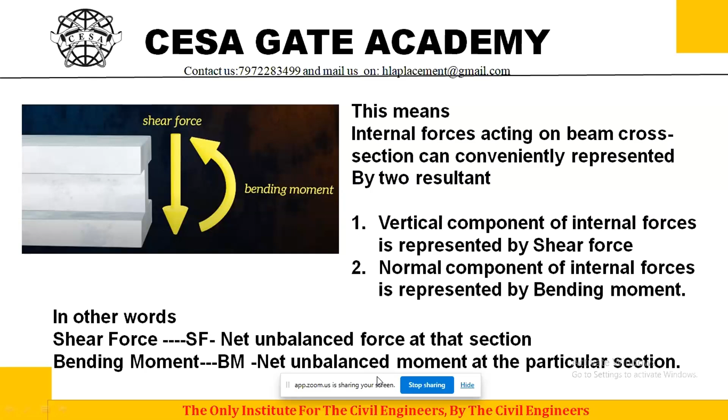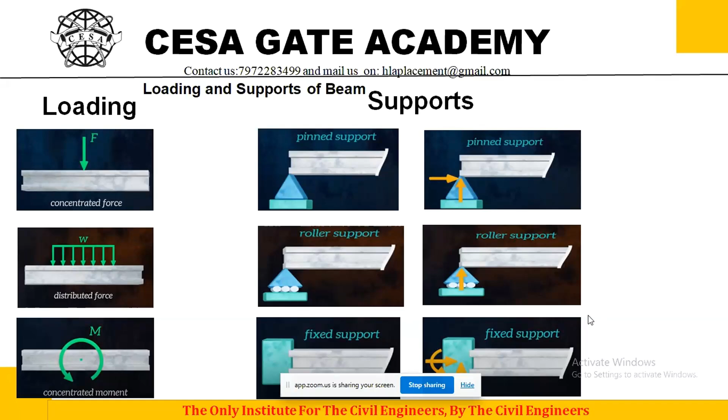Now, before going for the examples, this is just a quick revision of what we know as loading. So we know the concentrated load, we know the distributed load. In the distributed load, the uniformly varying distribution is also there. Then moment, concentrated moment. Then in supports, there are different types of supports considering the beam as a part. Pin support is having two different reactions, one horizontal and one vertical. Roller is having only a vertical reaction, and fixed support is having the moment along with horizontal and vertical reactions.

Now, what is the shear force and bending moment diagram? This is the variation of shear force. If we go on taking sections from one support to the other support, then what will be the unbalanced force at every section? If we represent that value in the form of a graph, whatever variation we are getting is nothing but the shear force diagram. Similarly, if we work out the unbalanced moment at every cross section of the beam from one support to the other throughout the length, and plot that variation, that is nothing but the bending moment diagram.

So there are three steps. First, you have to draw the free body diagram of the beam. Then, as sir mentioned earlier in the mechanics session, we have to work out the equilibrium of the beam and find out the reactions and reaction moments if they are there. These are the three equilibrium equations: summation Fx, summation Fy, and moment. Then determine the shear force and bending moment at a particular section along the beam.

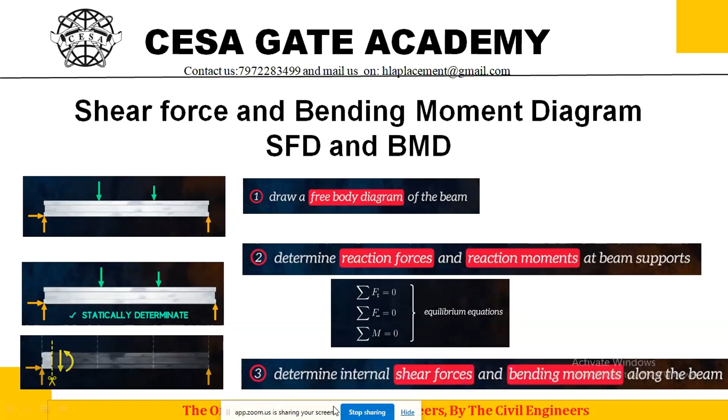Now, general sign conventions which are used particularly for defining the shear force and bending moment. These sign conventions vary according to the concept. Let me tell you, sign convention is for our convenience. If somebody is taking upward positive and downward negative, somebody else may take upward negative and downward positive. Sign convention is for our convenience. We need to understand the sense in which the unbalanced force is acting. Similarly, we need to understand whether a clockwise or anti-clockwise moment is unbalanced at that particular section, and accordingly we can define the sign convention.

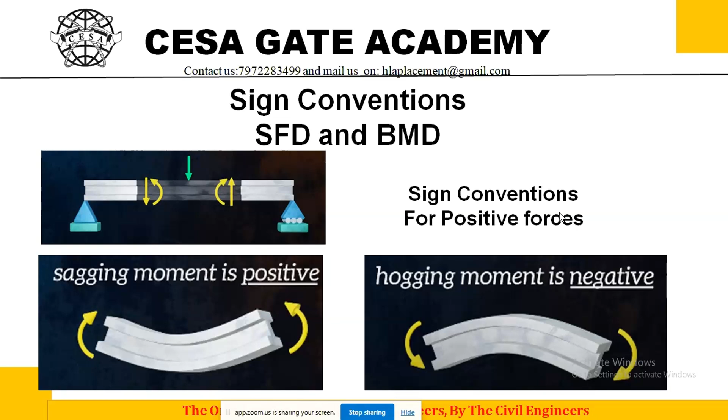Maximum times, the jumbling happens in this particular part of calculation, that is, defining the sign convention, right? Sagging moments are normally considered as positive and hogging moments are considered as negative. Let us take an example. It is a simply supported beam. I'm just taking a simple example. I'll show you one or two examples which occurred in the previous GATE examination. For this demonstration, I've put up a simple example of two point loads, 15 and 6 kilonewton, at 2 meter spacing each.

Now, if we work out the reactions, if I take summation Fy, Ra plus Rb is equal to 15 plus 6, 21, right? If I take the summation of moments at B, then Ra into 6, plus 15 into 4, plus 6 into 2.

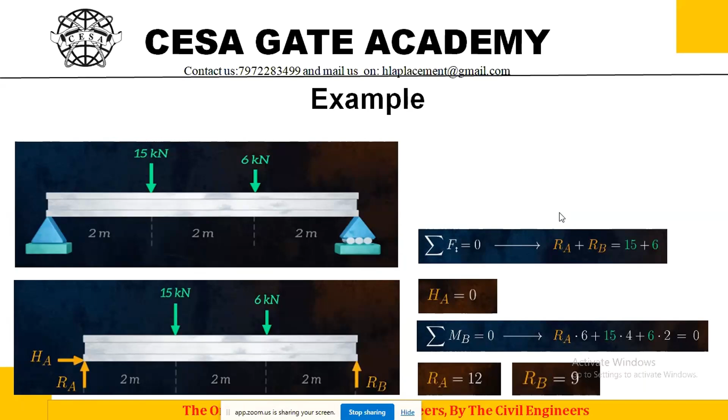So together, Ra is worked out to be 12 and Rb is worked out to be 9. This is the very first step of our shear force and bending moment calculation. Now, if we take a section in between the left reaction and just left of the 15 kilonewton force, in between the reaction and just left of the first force,

what is there? There is only one force, that is 12 kilonewton, which is upward, and there is no other force. That means there is an unbalanced force of 12 kilonewton which is upward. Similarly, whatever moment is created by this 12 kilonewton force is the only unbalanced moment up to just left of the 15 kilonewton force.

Now, you can see in the diagram, shear force is up to 12 and bending moment is 12 into 2, that is 24. This is up to any section in between the left and just left of 15 kilonewton. Once the section line crosses 15, then the 15 kilonewton force gets added. So 12 is upward, 15 is downward. So what is remaining is minus 3 downward. As downward we are considering negative.

So 3 is downward. So at the 15 kilonewton, if we cross the section line, minus 3 will be the shear force. So from 12 to minus 3, the shear force line you can see. And then again from 15 to 6 kilonewton, what will be there? There is no other force which is getting added. So 12 is upward and 15 is downward. This is the combination which remains constant up to 4 meter, just left of the 6 kilonewton.

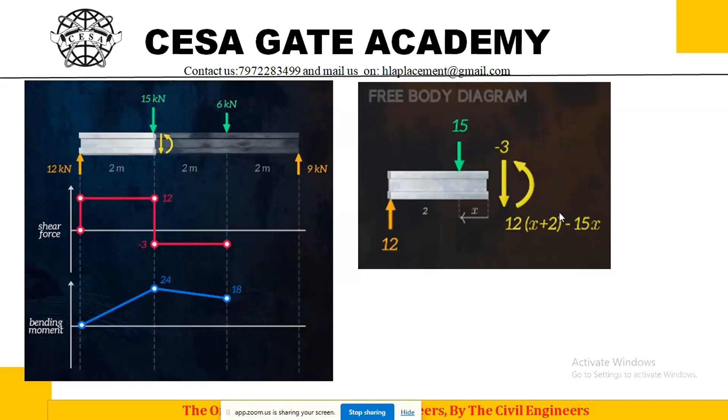So again, as I mentioned in the previous slide, you just have to concentrate on what is the net unbalanced force at that particular section. Similarly, for shear force and bending moment, these two definitions have to be fixed in your mind, right? Once these definitions are fixed, whatever the question is, we can just check it with the concept, whether it is unbalanced force or not. That's all.

Moving to the last part, the last 2 meters. Once we cross the section, if we consider the left side of the beam, the unbalanced force is 12 upward, 15 downward, 6 downward. 15 plus 6 is 21 downward and 12 upward, so what is remaining is 9. So minus 9 is the unbalanced force when the section line crosses just right of the 6 kilonewton. This combination remains the same up to the right hand support.

Similarly, 12 into x plus 4, if we consider x from 6 kilonewton, minus 15 into x plus 2 and 6 into x. Now you will find that at x equal to 2, the summation will be 0: 12 into 6, 15 into 4 and 6 into 2. It comes to 0 because this is a simple support, and at the support the bending moment should be 0. And this is how the bending moment diagram can be worked out.

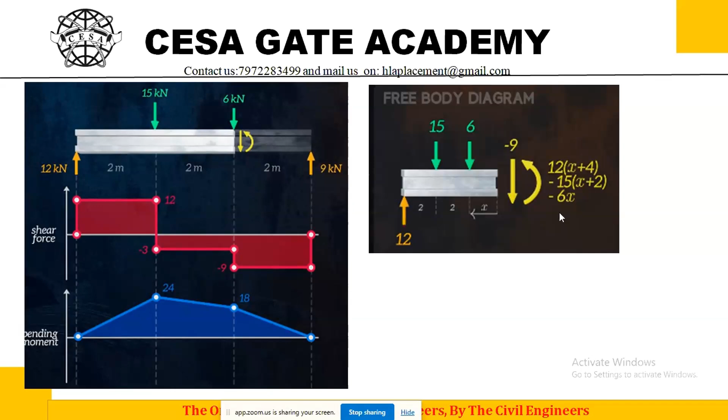I hope everyone is understanding. Is there any doubt up till now? If we don't have doubts, let us continue.

What is the relation between the shear force and bending moment? This is again a little bit mathematical, but it needs to be understood. Of course, this relation will require an entire session, and I'm just putting it in one slide to understand. In continuous sessions, separate time will definitely be given for this part. There is a relation between applied load, shear force, and bending moment.

Now, if we consider load as a function of x, then what is dV by dx? dV by dx is nothing but the slope of the shear force curve at a given point, which is equal to minus the distributed force. That is, dV by dx is equal to minus w, and the slope of the bending moment curve at a given point is equal to the shear force. That is, dM by dx is nothing but the shear force.

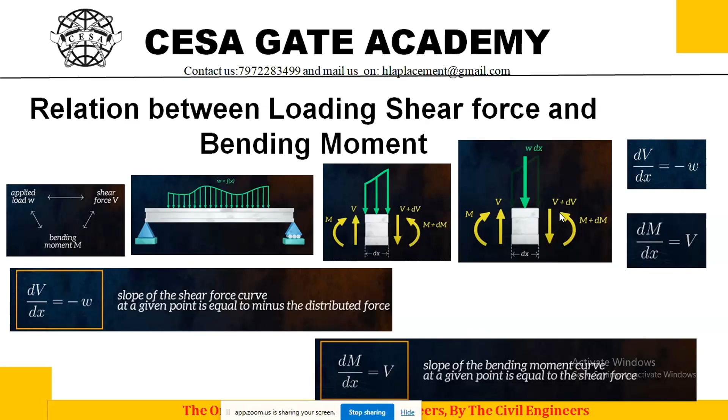Of course, the equilibrium part is shown in the diagram: on the left side is the upward force, and the clockwise moment and anti-clockwise moments are shown on either side of the part dx, which is, what we can say, this portion of a beam. Dx is the length of beam which is considered.

Now, if we integrate dV by dx, which, as I mentioned, is the slope of the shear force curve at a given point, the change in shear force between 2 points, V2 minus V1, is equal to minus the integration from x1 to x2, first position to second position, of the area under the loading diagram between the 2 points, that is w into dx.

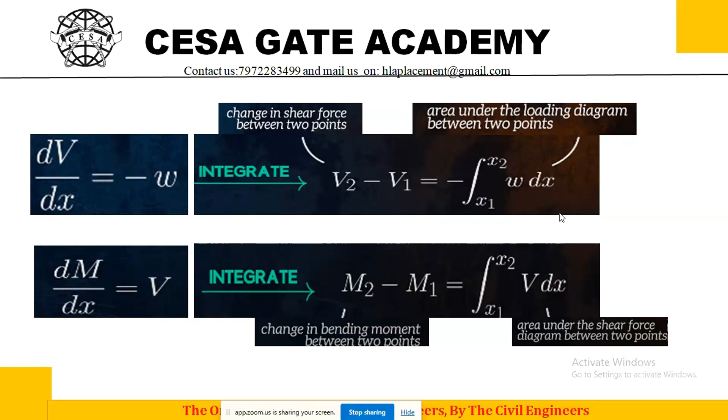Similarly, dM by dx is nothing but the shear force. If we integrate that particular part, the change in bending moment between 2 points is nothing but the integration of the area under the shear force diagram between 2 points, from x1 to the other position. Whatever the shear force diagram, if we find out the area, that is nothing but the change in bending moment between 2 points. And this is the relation between shear force and bending moment. And this is the final shear force and bending moment diagram which we can see.

For another example, just similar to that, there is a 12 meter span beam, with 8 kilonewton per meter UDL, and the point load is at 2 meter from the right support. Now you can again see 34 is the reaction, 50 is the reaction on the right hand side. Now again, just quickly, I'm not going to tell this particular part in detail. We're going to consider a few more examples in the sessions.

Now 34 for the first 2 meters, 34 kilonewton remains same in shear force. 34 into 2, 68 will remain the same till just left of the UDL. Once we are entering the UDL, the equation of moment is getting changed, minus 4x square plus 34x plus 68. Now that portion is a second degree curve, which we call a parabola. And you can see in the shear force diagram,

as it's a uniformly distributed load, the load is varying according to the change in length from 0 to 6 meters. Earlier the point loads were there; now here the uniformly distributed load is there. So from this particular part, the variation of shear force is linear. Then the first degree changes to second degree in bending moment. This is how we can work out the shear force and bending moment diagram for different kinds of loading.

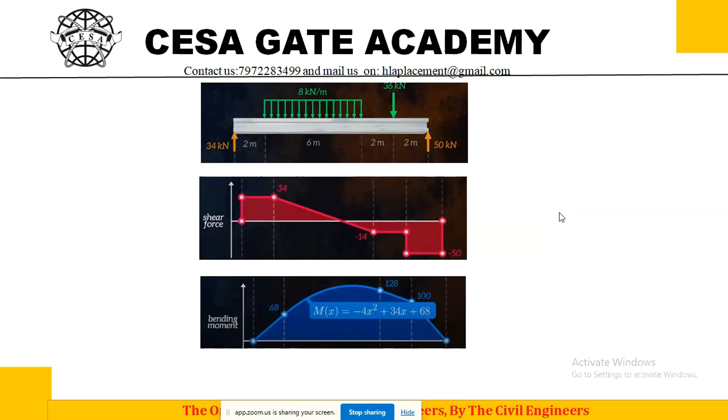Now these are the examples. This particular example is from GATE 2018. For a simply supported beam of length L subjected to uniformly distributed moment m kilonewton meter per unit length as shown in figure, the bending moment in kilonewton meter at a mid-span section of the beam is: option A is 0, option B is M, option C is ML, and option D is M by L. Now this is a little bit tricky, but the concept remains the same. Again, it is an unbalanced moment.

But the concept is that the moment which is given is kilonewton meter per unit length, right? So it is not only M, which we normally take as a couple. So total moment, the reactions are worked out: M into L is equal to RB into L. So L gets cancelled out and RA remains M. So one reaction is going upward and another reaction is going downward. So the reaction is not M by L. The reaction is M.

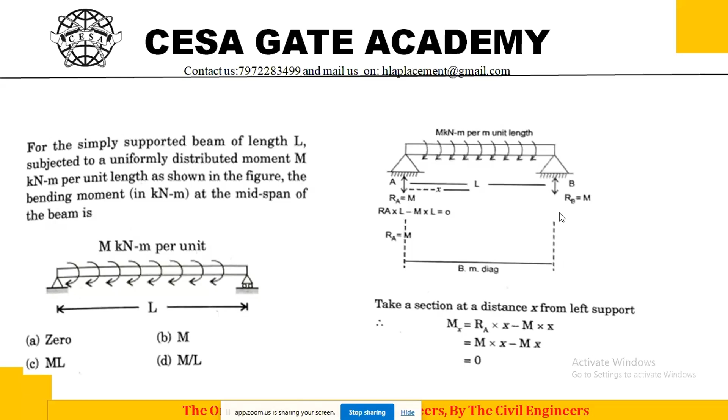So RA into x minus M into x. So M into x minus M into x. That becomes 0. So answer is A. So this is a short tricky question, but definitely this can be worked out with the help of the concept which we have seen, that is the unbalanced moment and unbalanced force at that particular section.

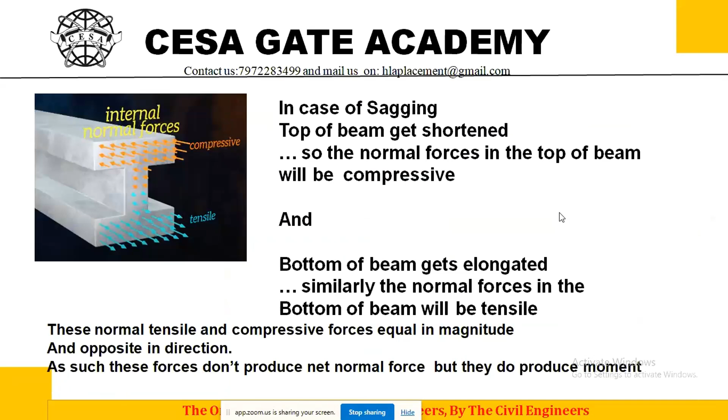Of course, other parts of solid mechanics, that is simple stresses and simple strain relationship, simple bending theory, flexure stresses and shear stresses, we're going to discuss in depth. Shear center, uniform torsion, transformation of stresses will also be covered in the schedule. And the last part, which is also important, is buckling of column and combined direct and bending stresses. Around 7 to 8 marks questions are there on this particular topic.

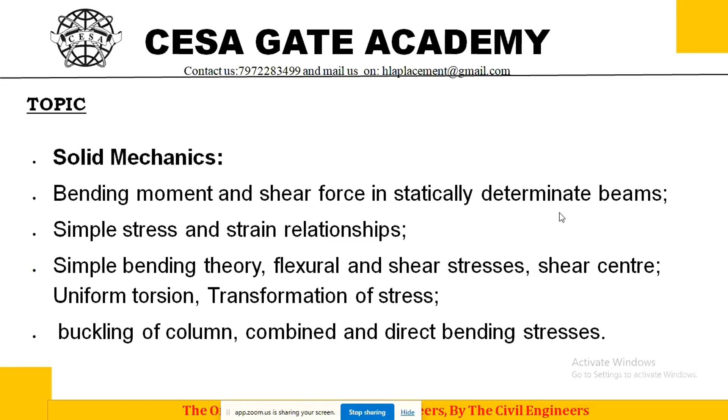And shear force is also important from the MPSC point of view. If you compare the MPSC syllabus, this particular part is included. And in the previous MPSC question paper, a 15-mark question was there on shear force and bending moment, with a very simple beam. But people were not able to even work out the shear force and bending moment diagram for the simply supported overhang beam in the previous examination.